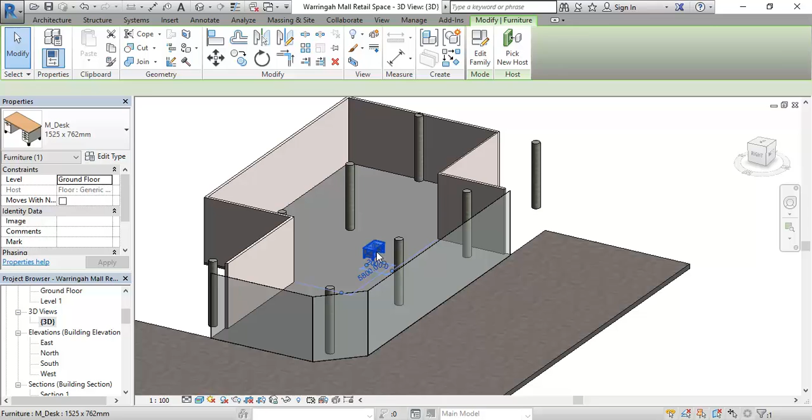Okay, so I've got the curtain walls there pretty much where I want them. Now I just want to experiment with some different options for the facade and put in some of the framing element. On the architecture tab you have the curtain grid tool and the mullion tool that will let you add those things to your curtain walls.

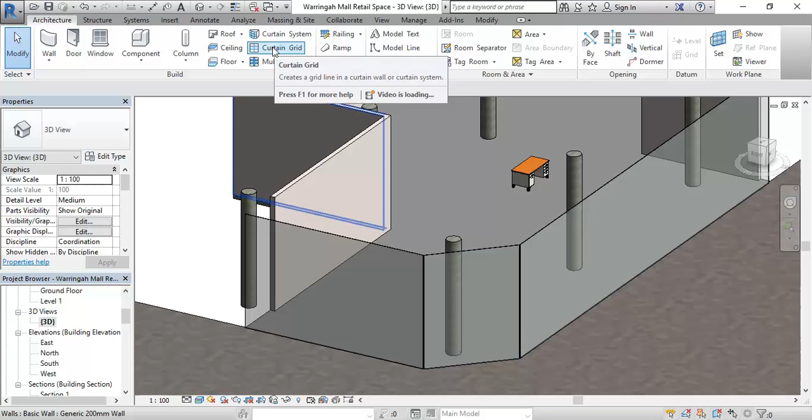Starting with the curtain grid tool, I'm just going to move my cursor onto one of the edges, either the bottom, top, left or right side. Once you're near one of those edges of the curtain wall, you'll see the grid line. Because I'm on the bottom edge, it's got a vertical grid line. If I go to the side, it'll give me a horizontal grid line.

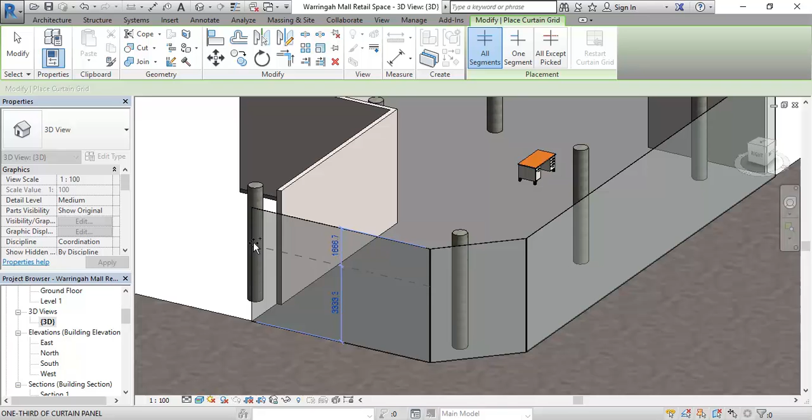Once I've got the grid in position, I can just click, create it, and the dimensions will stay there as usual. Afterwards you can always select that dimension and change the measurement if you want it. Okay, so that might be a bit tight, and I can always again just go back and change that.

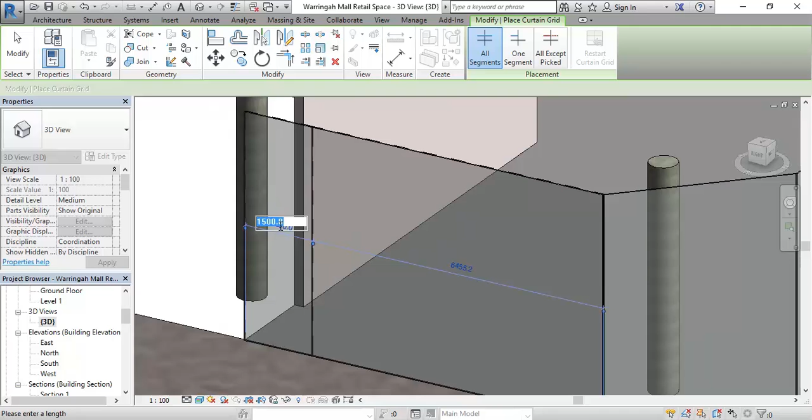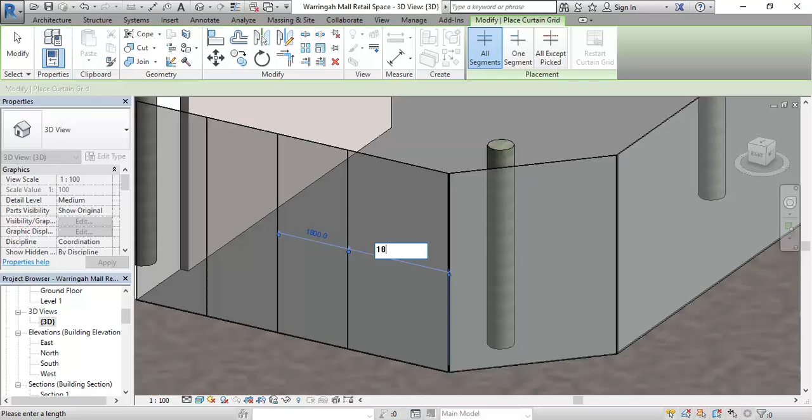So I can go along like that and just choose additional grid lines. I might do a few with the same spacing. So here I've got a grid that's a different measurement, but I'm going to change that to 1800. And then I might use that leftover space for a door. So I can go along here and again put in same or different spacing.

Now there are of course ways of automatically putting in grid lines at an equal spacing, but it's good to just get used to doing it manually as well, because there'll always be times when you want different grid spacings.

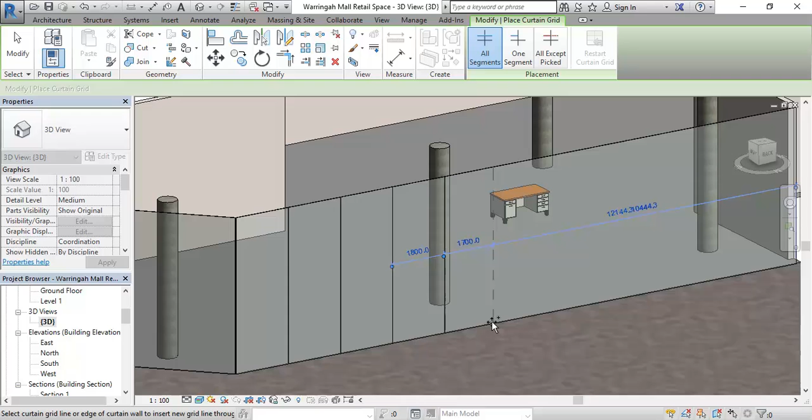You can always just draw them in like this, so let's do a few more. Actually I might leave a few of those — I've got another idea, I'll do something different there. So I'll make this one 1800 at the end.

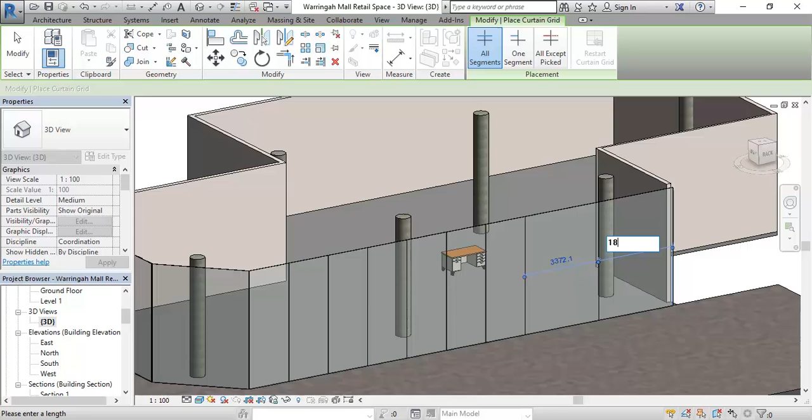Then I might put in some horizontal grid lines. So moving to one of the vertical edges now, doesn't matter which one. Again, click to put in a grid, and then again adjust any of those measurements. Maybe we'll make this 2700.

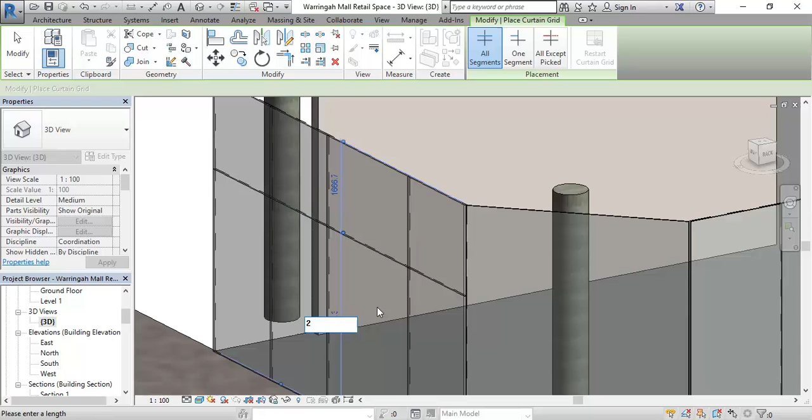That often is a good height for a door, but here, because we've got — well actually it looks high, but we're going to bring that down once the bulkhead goes in. So I'll leave it 2700 for now, and I can always bring that up later if I need to.

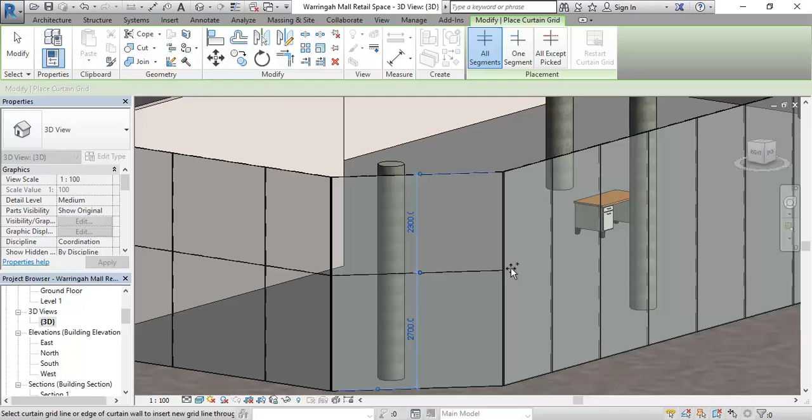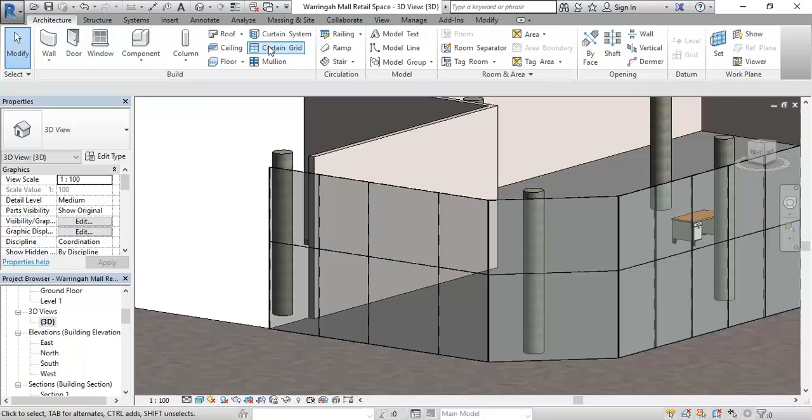Just want to show you how to remove grid lines if you want to take out any there. I'm going to press escape twice to cancel curtain grid, and then you'll see I can select a grid line. Watch out, you can easily select the wall by mistake, but you can definitely click on individual grid lines, and then you'll see you get the add remove segments button.

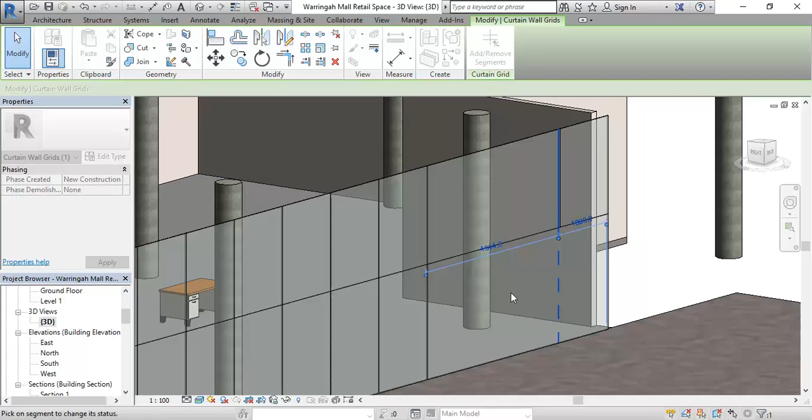So I'm just going to click then to remove a segment — sorry, this one at the bottom. So now it's just got the part at the top remaining, and I'll just click to one side to deselect that, and then select another grid line.

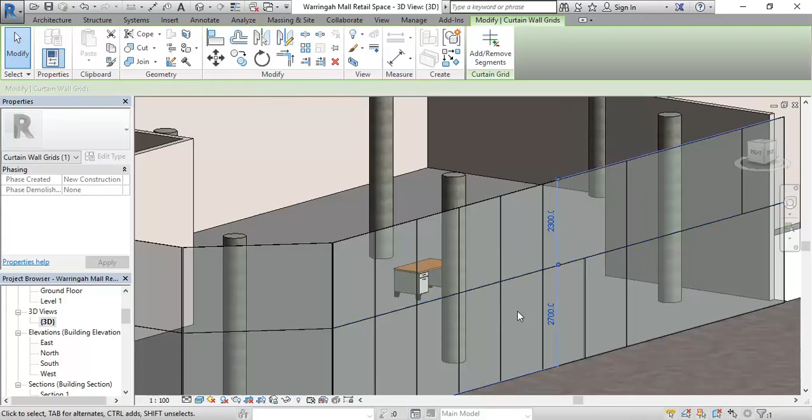So I'm going to try and get this one now, and then add remove segments, and maybe I'll take the top one away there, and just try to build up a bit more pattern there. So maybe I'll try getting the horizontal one now, and then again add remove segments, and let's try taking this one away, and just keep going like that.

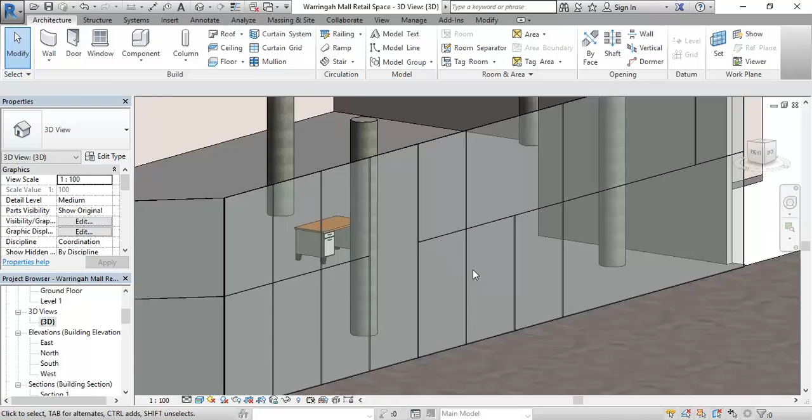And if you have a look at a lot of well-known designers' work, you'll see that from a basic grid like that, they can build up some really interesting patterns. And obviously what we were looking at with Mondrian earlier, you can probably get similar ideas.

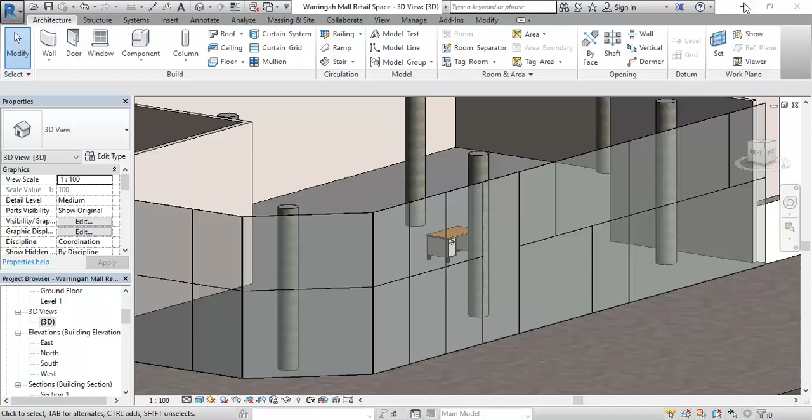So again here you can start to build up some sort of pattern, even if it's just a rectilinear grid like this. And apart from Mondrian, Seidler was the master of facades like this, and you'll see in a lot of his work he had very simple grid patterns, but broken up in interesting ways, and you can easily do all of that with the curtain wall tool, thinking about your grids.

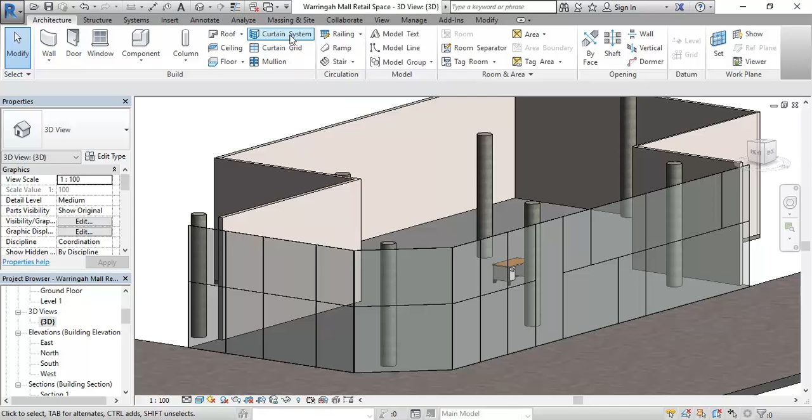Yes, that's a good point. So if you need to do things at different angles, you can definitely do that - try using the curtain system tool, that will do it, but it's quite a difficult tool to master. Otherwise, model in place is going to work pretty well.

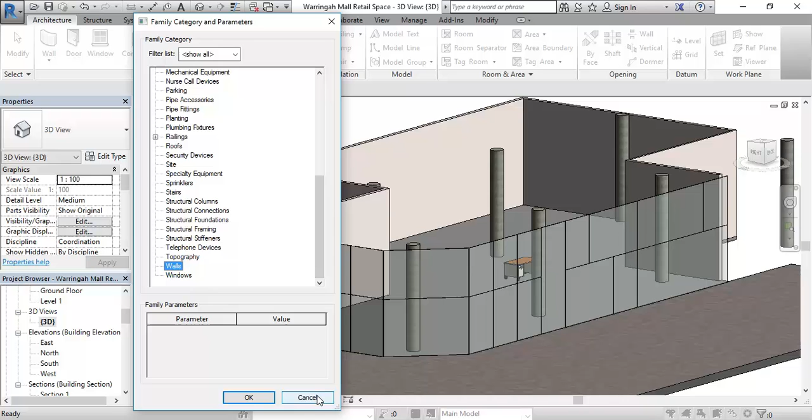So you can model using component, model in place, and you can make curtain wall components, or you can even just set them to a walls category and model all the parts you need. If you're going to try that, those reference planes you made earlier will help you a lot there. But I'll give you some examples of modelling those types of things later.

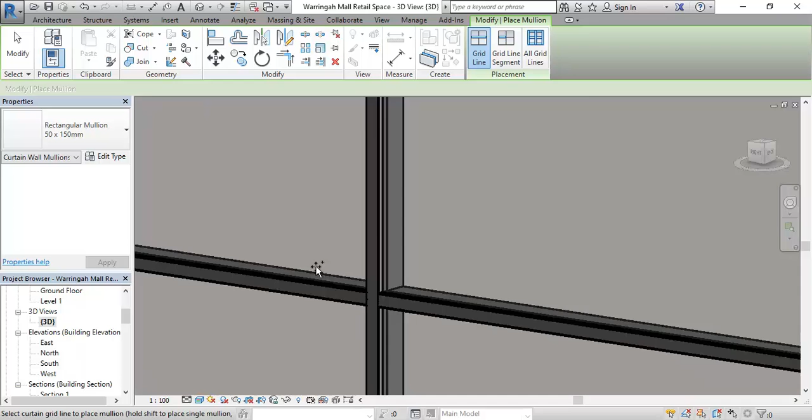So now just with this rectilinear grid, I'm going to go to mullion, and I can choose any of those grids, and just put a frame onto them. Zooming in there, you can see we've got a decent mullion. There are lots of different mullion types. I'll press escape, and then click on the mullion tool on the architecture tab.

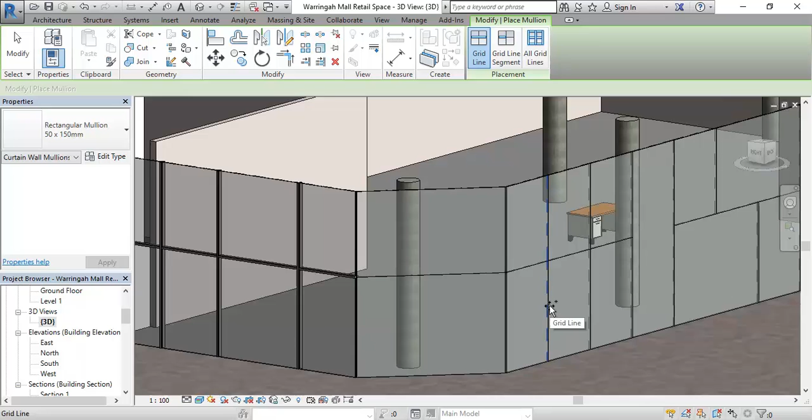And then you can just pick grid lines, and it'll put mullions onto them. So just mullion to the right, two buttons - yep, that's it. So any grids there can have a mullion. They don't all need to have a mullion, but they all can.

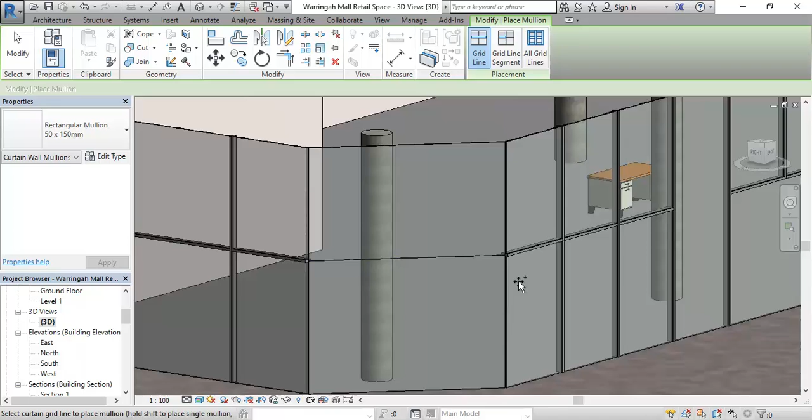So mullion is simply a division between framing pieces that divides up the glass, in this case. In the window in front of you, it's that piece in between the two windows. So I've got enough mullions on the straight parts, but then I want them on the corners here as well.

So, like I was saying, you have lots of different types of mullions. When you click on the properties panel, on the name at the top, you'll see there are quite a few preloaded, and it'll start with the rectangular mullion 50 by 150, but you can then choose the trapezoid mullion, and that'll work really well for the corners.

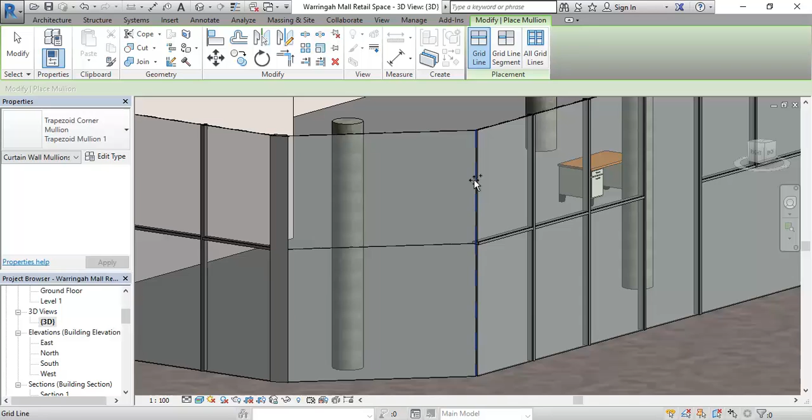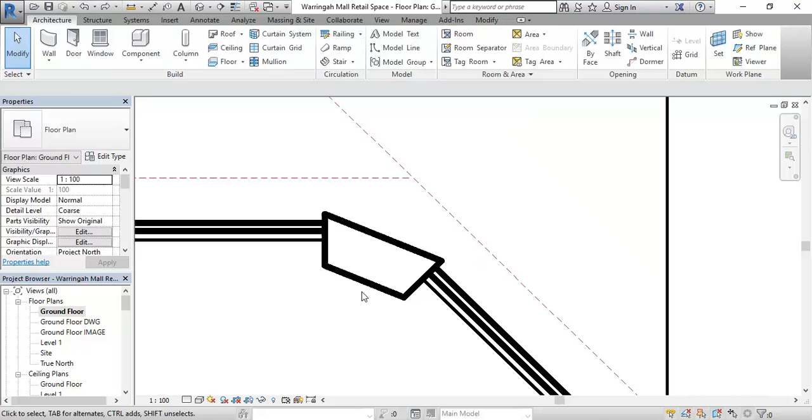So you'll see, I know it looks too fat, but if we have a look in the floor plan, you'll see that it's joining at the corner properly. I should show you, if that was still a rectangular mullion, it wouldn't have joined properly. So I'm going back, and as a trapezoid mullion it works well, but it's too big at the front.

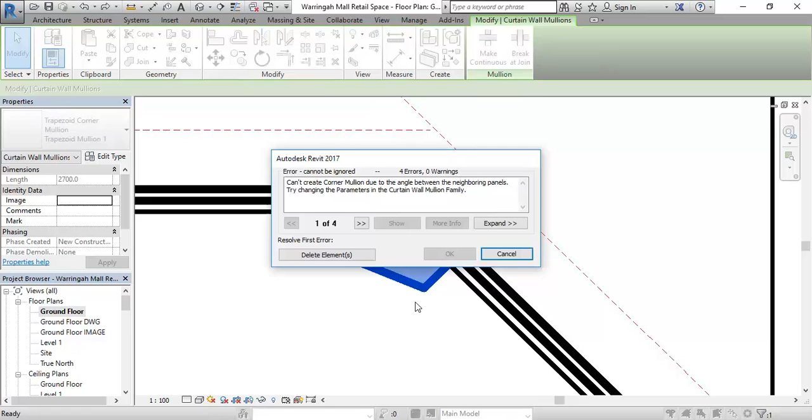So I'm just going to make sure it's selected and go to Edit Type, and you'll see down the bottom you've got the centre width and the depth. So I'm going to change the centre width to 50 and click OK. Sometimes you've got to try it to see how low you can go.

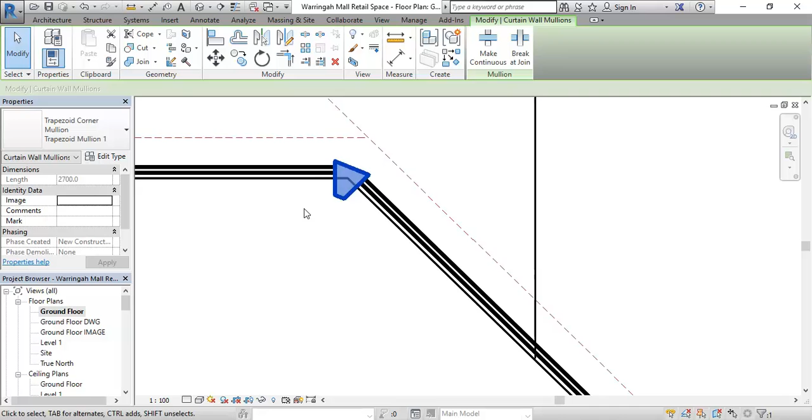I've gone too far there, so I'll try that again. Back to Edit Type, and I'll try 100. There we go, so that's worked because it wasn't too small. And the other one will change automatically. Back in my 3D view, and you can see that looks a lot better.

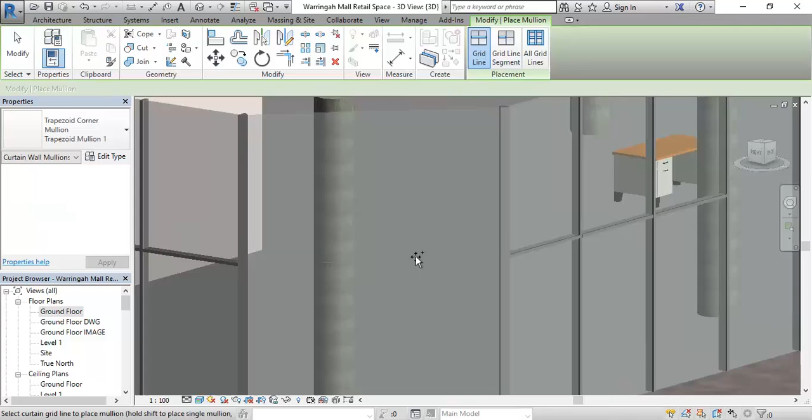And we can put a mullion there - well, maybe it would work well with that one. Did I choose mullion? Oh sorry, watch out there - see, I can't choose this grid line because I'm still on the trapezoid mullion. That only works for corners.

So I'm going to go back to the 50 by 150 rectangular mullion, and now I can choose that spandrel, or that fancy one. So that's all I wanted to show you, that you can put those patterns in.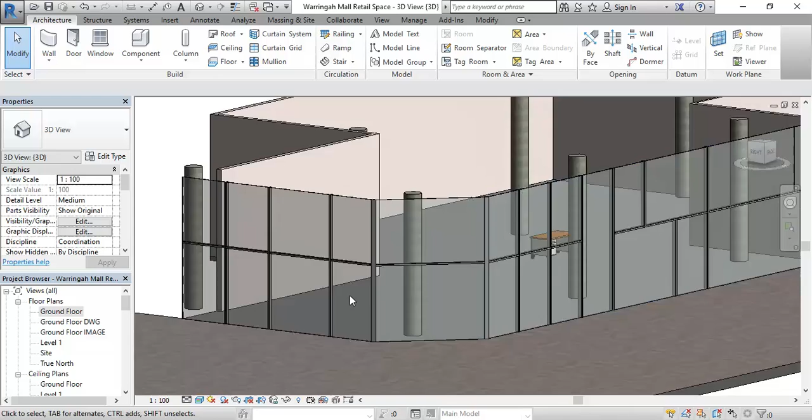So we've got plain glass panels, so we've got frames, but I still want to have openings. We need doors to get into the shop, obviously, so I'm going to select one of the glass panels now. And that's a bit harder than selecting.

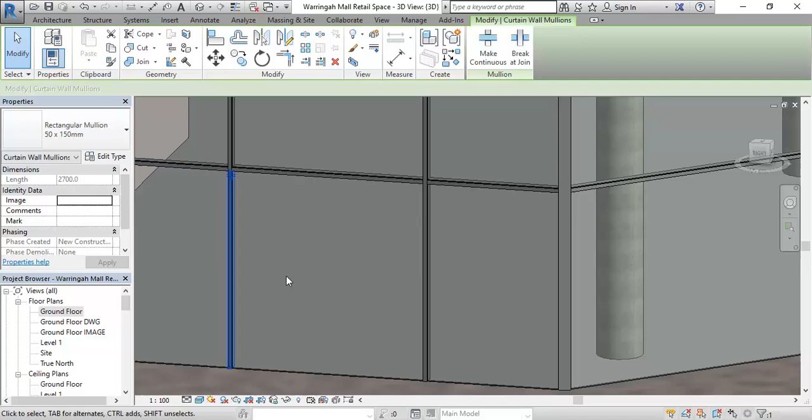I can select that. If I move it around enough, I can probably still select the grid line as well, even though it's underneath. But then the glass is going to be even harder.

So to select those, oops, so my mic's fallen, so hope this sounds working. Anyhow, we'll find out. So I'm going to just use the option key there though, which is tab.

If you're not comfortable using tab still, just remember you usually just need to move your cursor to where you think the edge is. So I think the edge of the glass is about there. Then before you click anywhere, press tab and see the option that you get. It's down here, if you're wondering, down on the status bar.

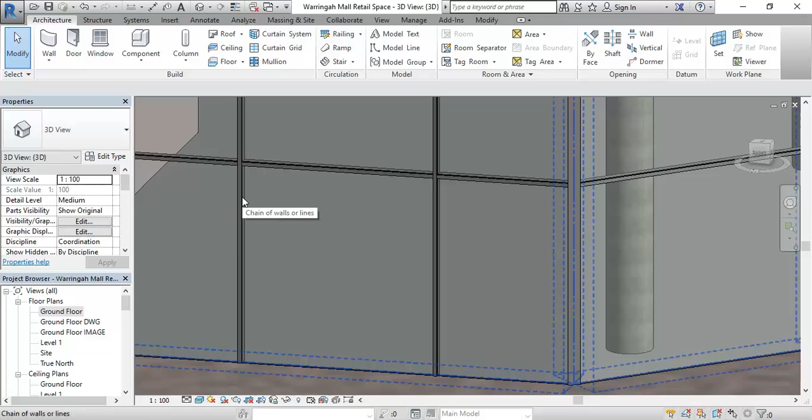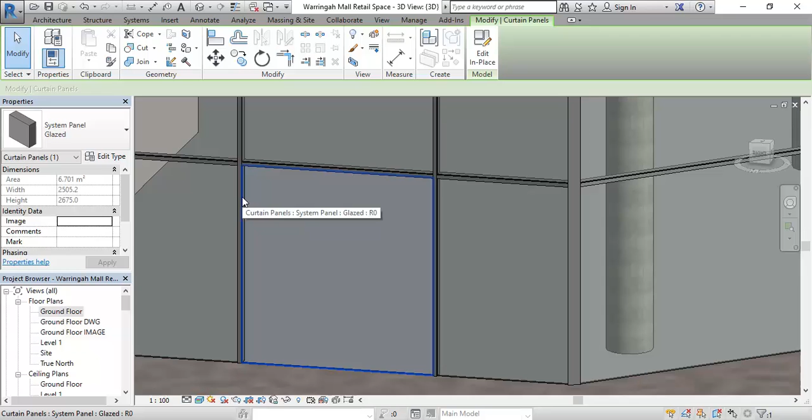So I'll press tab, and I can see on the status bar it's telling me chain of walls or lines. I don't want that, so I'll press tab again. It's got now curtain wall mullion. I don't want that either, so I'll press tab again. And it's got the grid now. I don't want that either, so tab again, and now it says curtain panels down on the status bar. And if you read further, system panel glazed, which tells me it's the glass. So finally I can then click to select it, and I know I've got the glass.

And that tab option key is useful in all kinds of situations, so it's worth getting used to it. So now that I've selected the glass, I can go to edit type, and then this is where the dreaded error comes in.

It's just a bug that's been in Revit for a little while now. That load button there should work, but it's greyed out, and it's simple to fix it. I'll cancel this and show you.

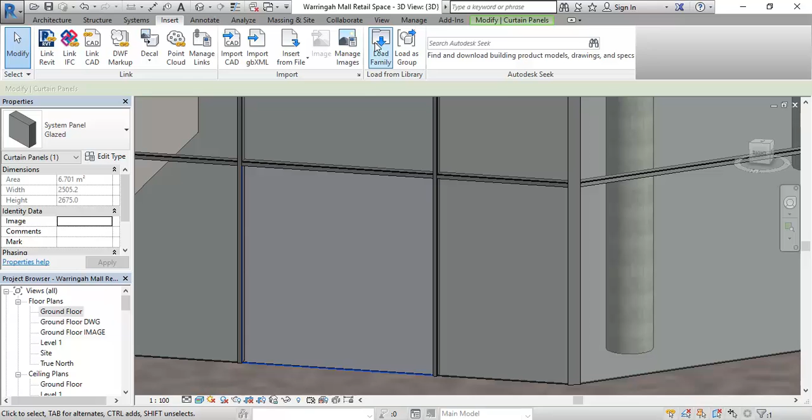You can go to the Insert tab, Load Family, double click on curtain wall panels, and then just double click on any of these. It doesn't matter which one. I'm just going to double click on one of the double doors. Doesn't matter, as long as you load one of them.

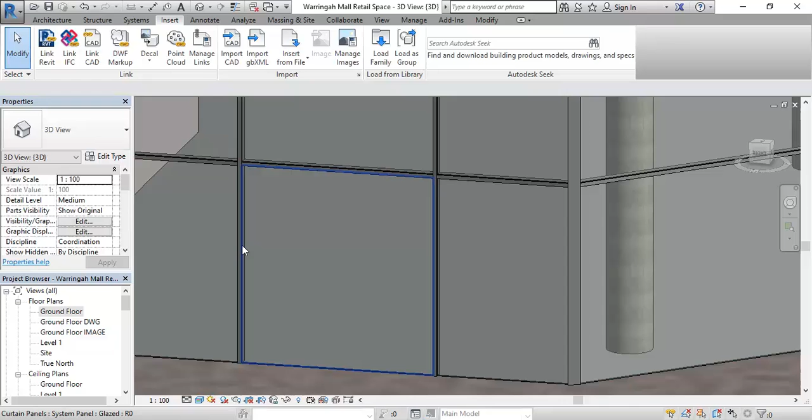Now I'm going to repeat what I did before. I'm going to use tab to highlight the glass, and then click to select it, edit type. Now the load button's working.

So I'm going to click load again and go to curtain wall panels again, and this time choose the door I want. Now the one I chose I think is pretty close to the one I want, but I'll show you there's some other pretty good ones for retail or commercial.

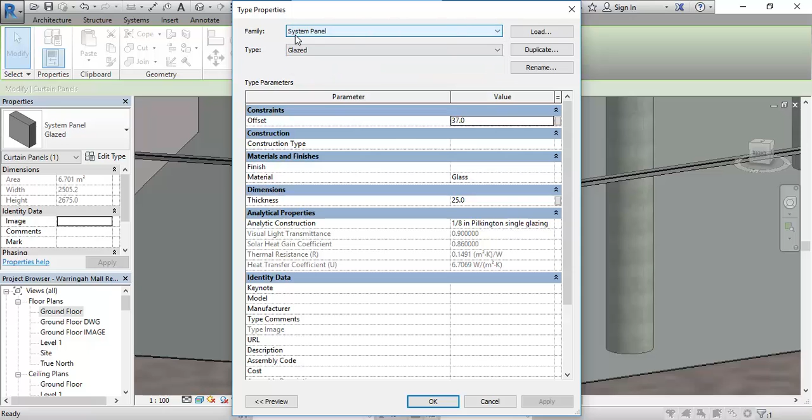And that's it. Now if I click OK, I've got a perfect door. Back in the floor plan, will of course show us the door as well. And just like any door, you can select it, and if you need to flip it, use the arrows. That easy.

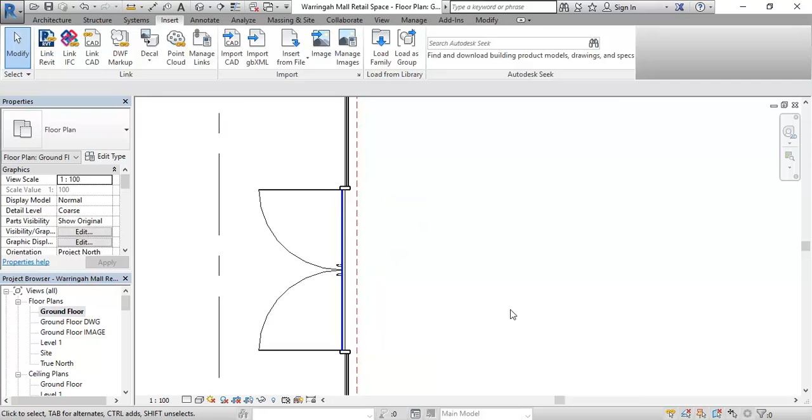Yep, sure. So I'll do it with another panel. So over here, another panel with a door maybe. So with tab, again, I can highlight the glass, select it, edit type, and then load.

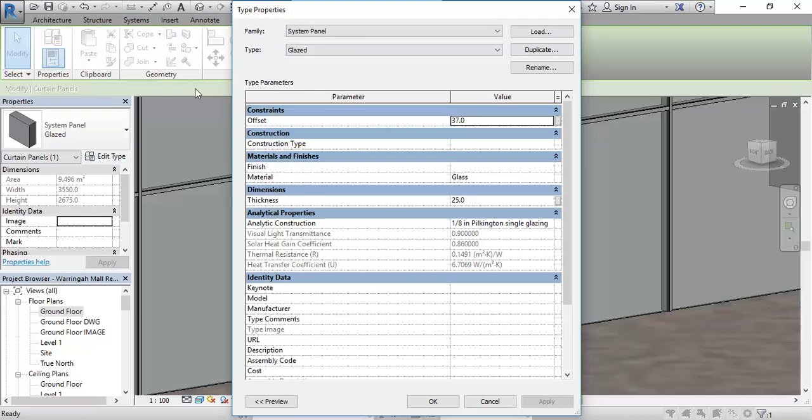So I'm going to double click on curtain wall panels there, and then I'll get a different door, so I'll double click on this one, storefront. And then OK. That was not as nice, but still works.

Okay, so you've got to get the glass first. So that's the wall. That's the whole wall. I'll come over in a second.